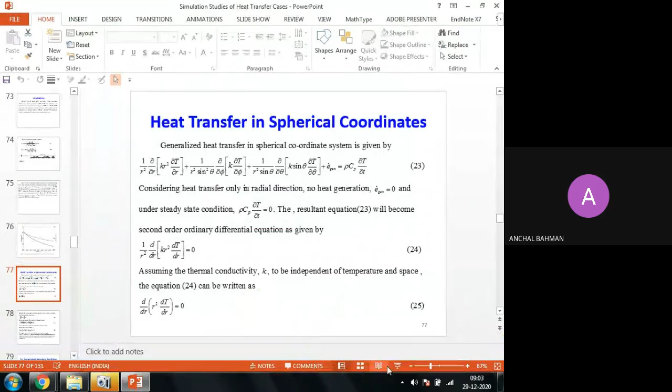Sir, are there any chances of offline classes to start anytime soon? Sir, at least for the MTech or the PhD, as we also have to work on our projects from next time. Yeah, that we'll talk later.

So here we were talking about heat transfer in the spherical coordinate. So this is what you have here. This is a standard equation of heat transfer in the spherical coordinate considering r, theta, and phi directions, with generation within the material itself and with the accumulation term also, right? So we want to simplify this also for a first primary level type of problem.

So for that we have neglected for the time being the generation term, with steady state operation and heat transfer in the radial direction only. So keeping those constraints, you will be left with only the first term, and for that you are getting this, and your partial derivative would convert to a total derivative because the temperature is the function of distance r only now.

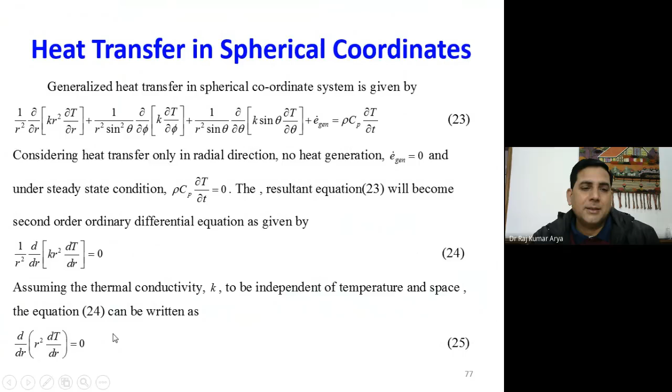Keeping constant thermal conductivity, the k can be taken out from the differential sign. So you will be left with this equation, and you can solve this analytically also. It means integrate it two times, right? And from the numerical method, you can differentiate that one and you will get r square d square T upon dr square plus 2r dT upon dr equal to 0.

And then discretize it using your finite difference formulation using the central difference expression. Substitute that, and if you rearrange it, you are getting your governing equation. So in this, you keep on changing your i, and you can generate your number of equations. As many difference points you need, those many equations could be generated. So let's say i equal to 1.

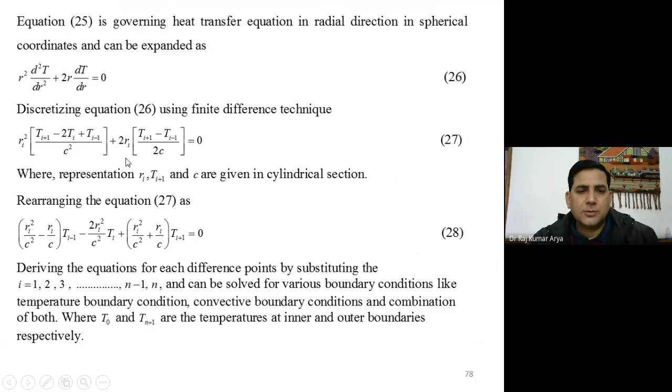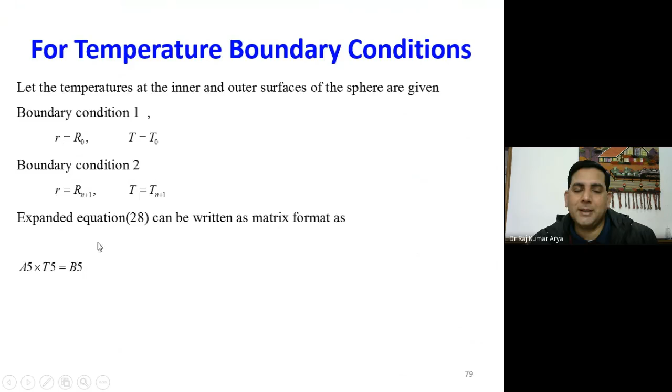So first we want to generate it for temperature boundary conditions. So first you have, let's say, temperature boundary condition at r equal to R naught, your temperature T0, and at the outside, r n plus 1, the temperature is T n plus 1. And then you generate the matrix and you can rearrange it in this particular format.

So for that, let's say you are putting i equal to 1. If you put that here, your T naught is known now because you know the temperature boundary condition. So this is your first boundary condition, and this would be on your right hand side. The rest is your left hand side because these are unknowns. T1 and T2 are unknown actually.

Then keep on changing your i: 1, 2, 3, 4, 5, 6, because this will always give you a trend of how the matrix is changing. Just putting 1 or 2 doesn't help sometimes. So it's better to put at least 4 or 5 equations so that you are able to identify the trend. This is always helpful in writing a good program.

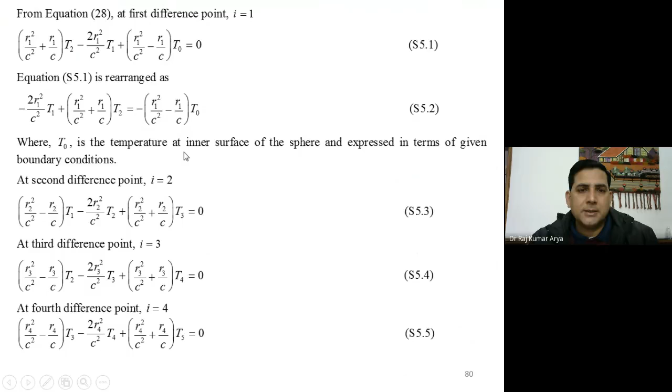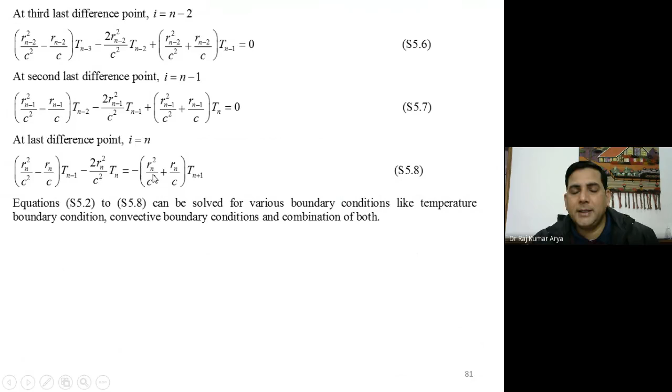So once you have generated that, then at the last point, at i equal to n, you got this, and this is your T n plus 1, which is your last boundary temperature. And then you can rearrange it in terms of a matrix, right? Yes. Yes, sir. So now this is your matrix for this particular case.

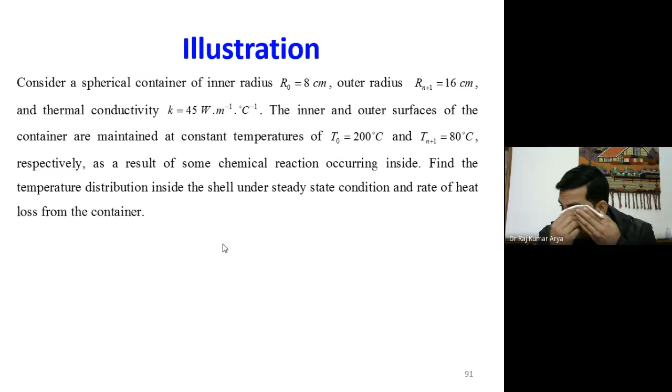So the problem statement is this: you have a spherical container of radius r naught equal to 8 centimeter. Then Rn plus 1 is 16. So practically you have Ri, and this is R1, R2. Thermal conductivity is given, and temperature at both boundaries is given, 200 and 80 degrees Celsius. And you are maintaining some temperature by a chemical reaction inside the hollow sphere, not anything injected inside the material of the sphere. So these are the conditions.

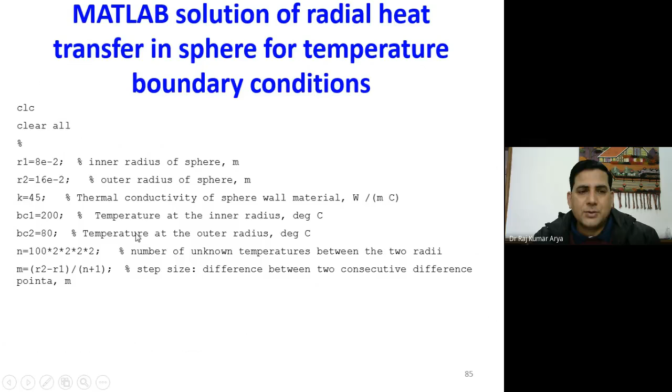So for that, this is the program I wrote here. It's the same way you generated previously. So then you wrote this program. This may help you. You can write your own, because you already wrote it, so you can write yours. This may also help you. So once you have this, the temperature calculation is over from here.

So then this is your temperature matrix. You want to add the boundary conditions there. This is what you have calculated from 1 to n. This is the last boundary temperature. So this is now your complete temperature vector, or column. Radius also, you want to add the first radius, last radius, and the in-between points. So you have a complete full set. Then you plot temperature versus radius.

Then after that, you are calculating your heat transfer rate, how it changes at each point. And then you are calculating your analytical solution. An analytical solution is possible for this case. These are again the same commands, just a copy and paste from the previous one. The only thing you are changing is the variable name. Rest are same. Okay. So you should try these commands today.

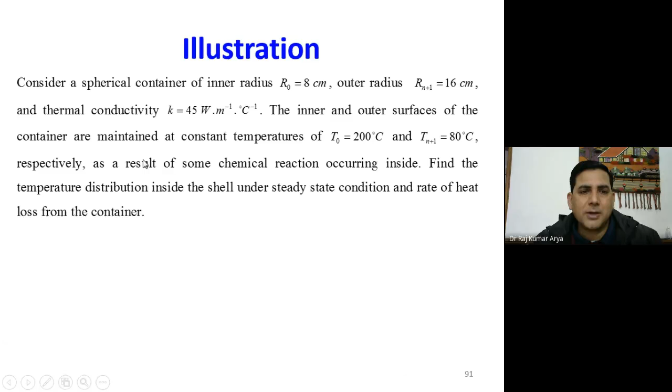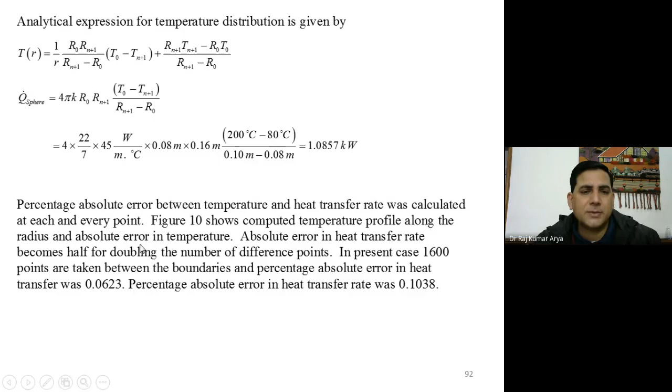Yes, sir. So after that, this is your analytical temperature expression for the case of a sphere, for the temperature boundary condition, and this is your heat transfer rate, and then you calculate error and all this. So once you do that, you will get temperature here, and then you calculate the absolute error at this particular point. Okay.

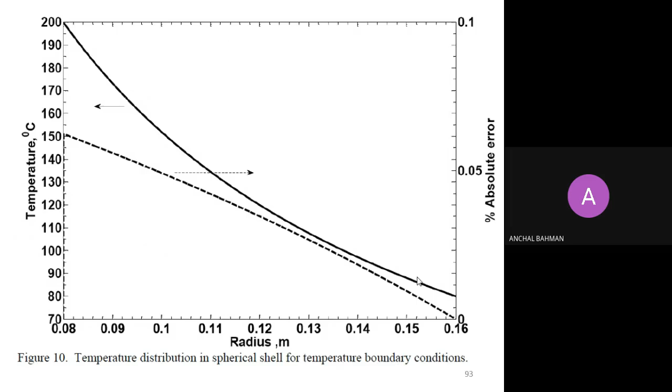Yes, sir. So once you complete this part, I have just shown your temperature and your absolute error. You can also calculate heat transfer rate. In the case of steady state, it should not change. So that's why it is not being calculated along the radius. It remains constant, so that's why it's not calculated here. Fine.

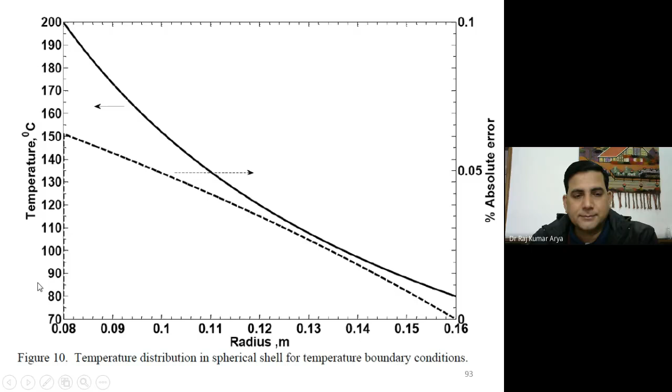Yes, sir. Anything in between you want to ask, because it's just an extension of the previous one? It's fine, sir. Okay, so next.